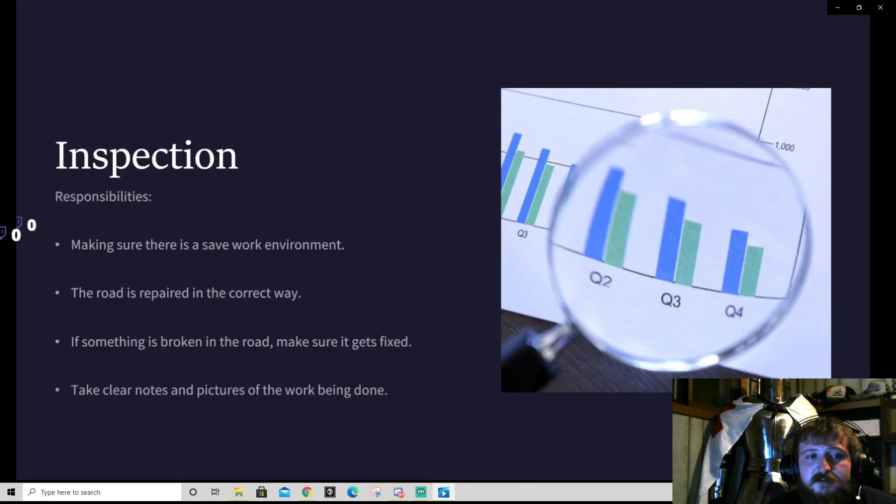Hard hats are required for anyone that enters the job site, because a lot of the times the machines are picking up heavy objects and rocks that could fall loose and hit you in the head, and possibly kill you if you're not wearing the right hat. Reflective vests are also a must, so cars on the road can see you coming, and also the people operating the machines can easily see you.

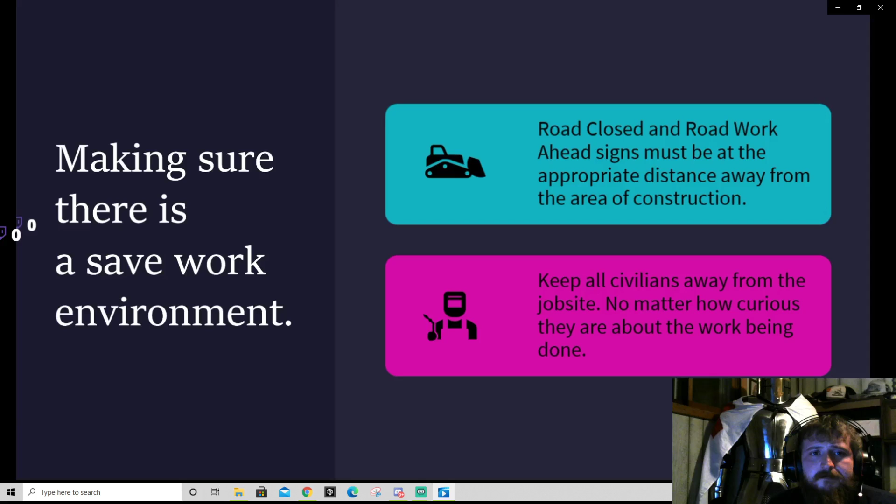Road closed and road work ahead signs are a must, and have to be at the appropriate distance. Because if a car is coming up the road, they have to know that the road is being worked on and that they cannot go that way. Also, a lot of the times people come up to you and ask, "Hey, what's going on? What's going on?" And you have to tell them to go away.

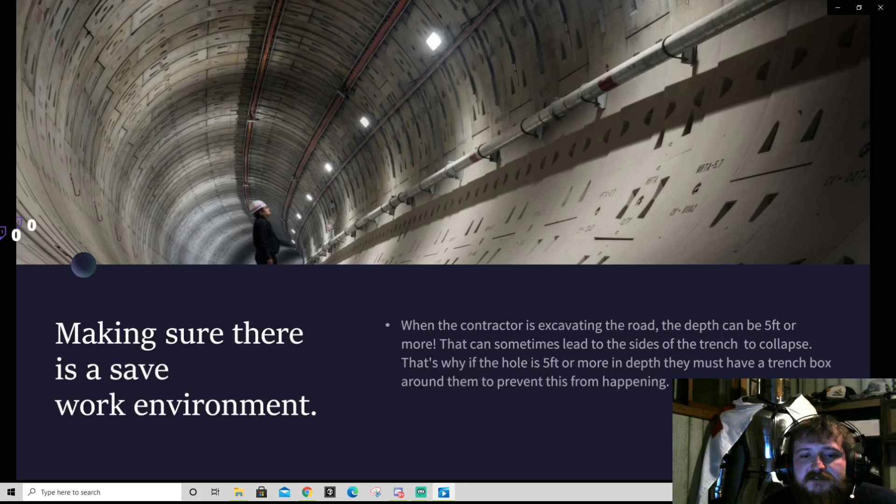When the contractor is excavating the road more than 5 feet deep, you have to have a trench box installed, because that trench box stops the edges of the roads from caving in on the workers inside, and a lot of the times that can happen. You just got to make sure that it doesn't for their safety.

If the road is not filled in and compacted the right way, potholes could form, and in PA, potholes are kind of the main thing that's wrong with our roads. The fill for the road is 2A modified, and it has to be compacted by a machine, and you can't just let them dump it all into the road and not compact it.

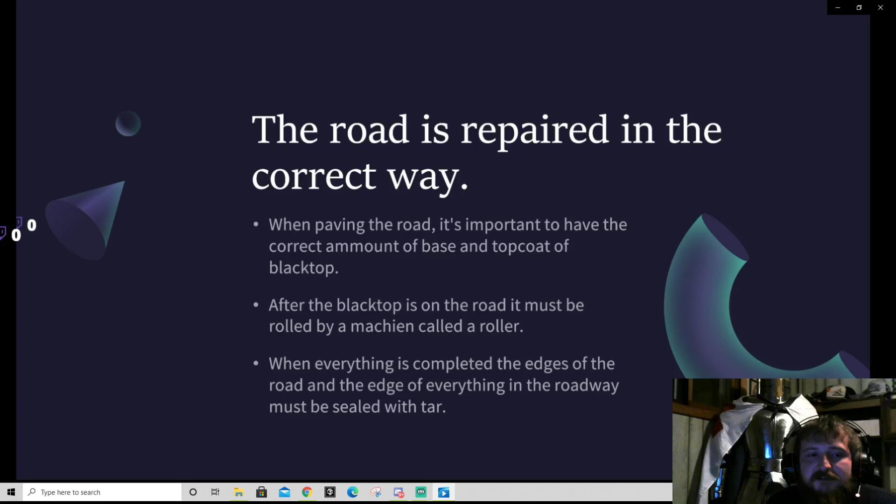When paving the road, it's important to have the correct amount of blacktop installed for the base and the top coat as well, and then after it is put into the road, it is rolled by a huge machine to compact it all down tight, and then after that, the edges of the road and everything in the road have to be sealed with tar.

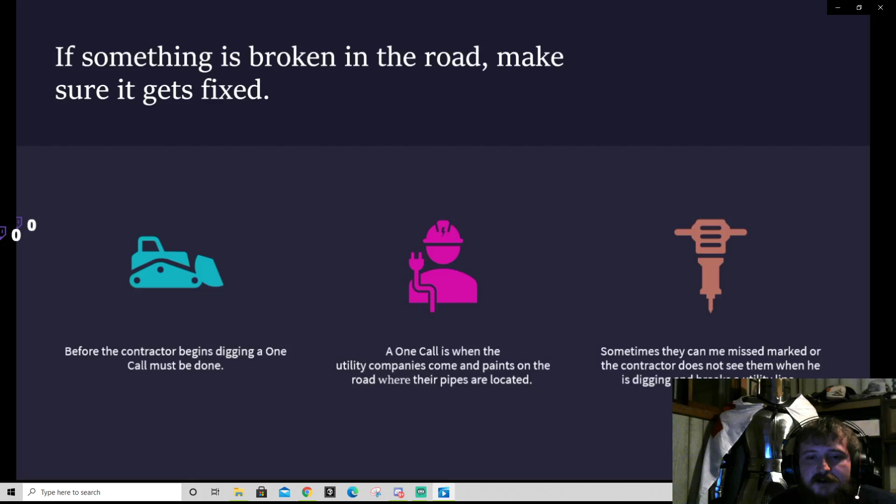If something gets broken in the road... before a contractor starts digging, a one call must be done. A one call is when utility companies come out and paint on the road where their pipes are underneath the ground, so contractors know where they are. And sometimes contractors end up hitting them because of mismarkings or they just don't see them.

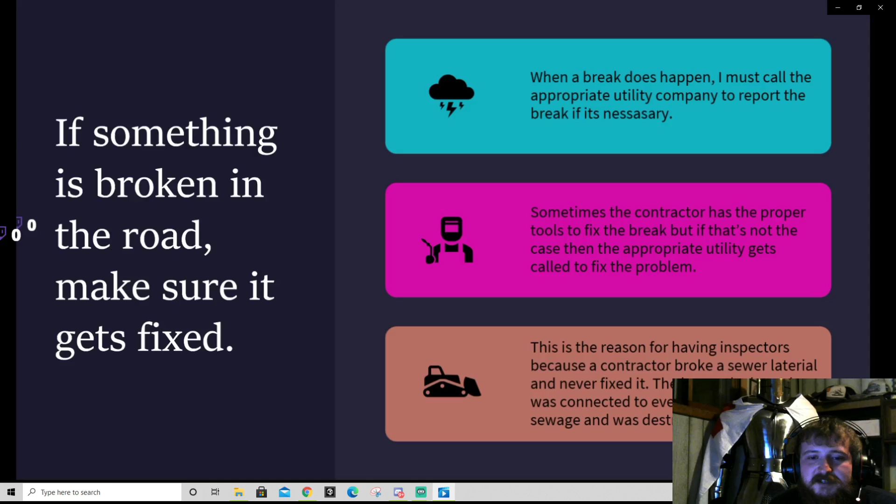When a break does happen, it's my job to call the appropriate utility company to come and fix it if necessary. But sometimes the contractors have their own tools that could fix the problem itself. This is the reason for having inspectors in the first place, because a lot of the times they don't get fixed and then bigger problems end up happening.

When inspecting, you must fill out a report for every job that you go to during the day, and that has to be a step-by-step process of everything they do. And along with that, it has to deal with broken pipes and everything else that happens during the day that went wrong. You have to kind of mark it down just so they know what happened.

And then you have to take detailed pictures as well, because a lot of the times the higher-ups want to know what the pipes look like in the ground when it's done. And obviously they can't see that from looking on top and all the dirt's put back into the road. So they like to have very detailed pictures of the pipe put together and everything that goes along with it.

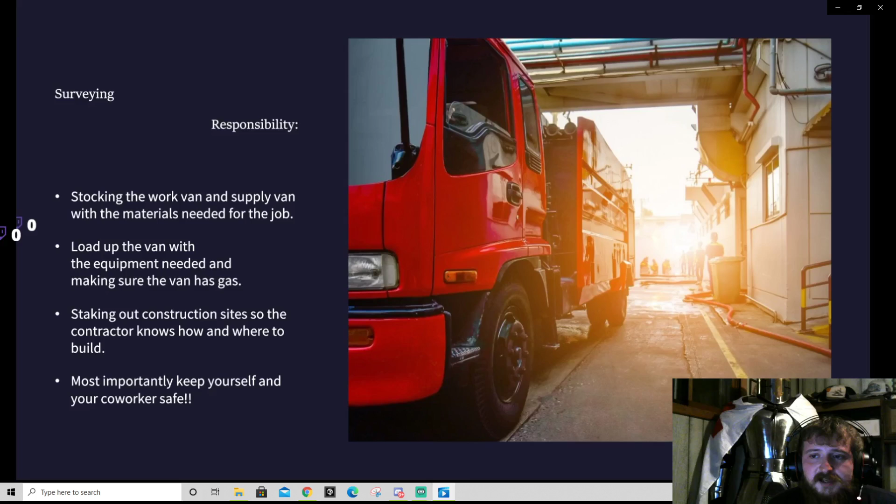Now, surveying. Surveying, there's a lot of responsibilities. I have to make sure the work van is stocked with the supplies needed for the job. I also have to make sure that we have the right equipment needed for the job as well, because some jobs require different equipment. I have to stake out large construction sites so the contractors know exactly where to build.

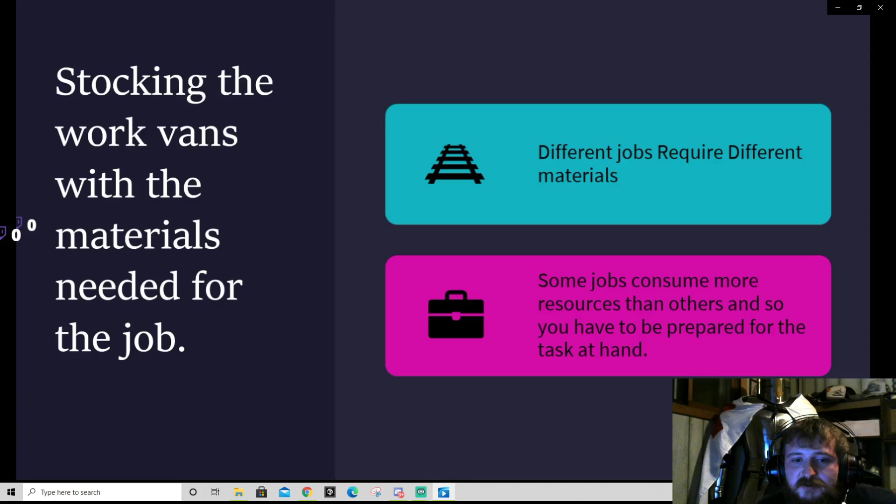Different jobs require different materials. Some jobs require nails and paint, and then other jobs require stakes and hubs. And some jobs require more resources than others. Some jobs you're only putting in 10 to 15 stakes. Other jobs could require over 100.

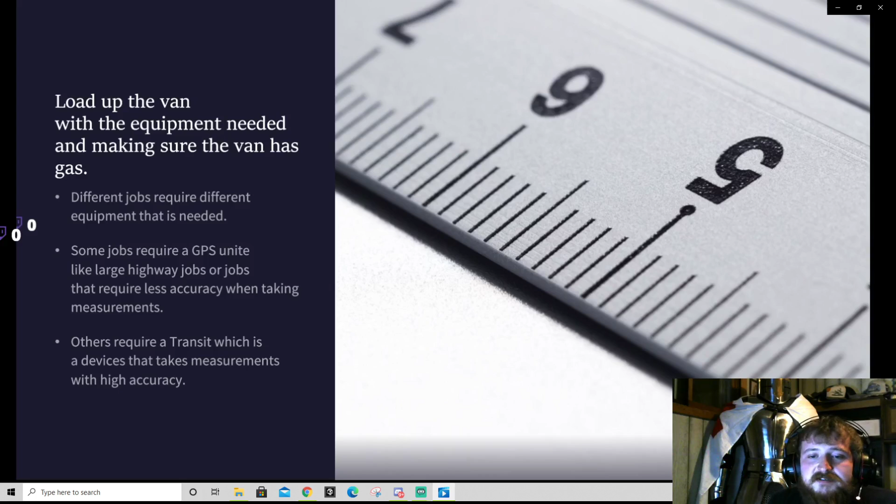Different jobs require different equipment, like I said. Some jobs require a GPS unit, which is made for bigger highway jobs, so it's easier to set up with. And then you have a transit, which is kind of more accurate for a pinpoint location and used more for elevation.

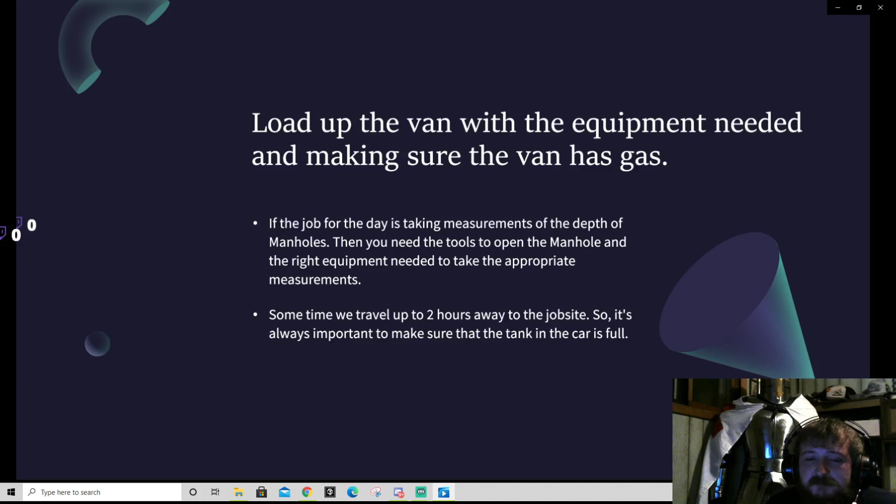If the job is taking measurement depth of manholes, you need appropriate tools for that, because you can't just open that with your hands. You need certain tools to be able to open up the manhole, and also certain tools for measurement. You can't just stick a regular tape measure down there and, yep, that's how deep the hole is. No, there's certain tools for it as well. And also the gas for the car, because we travel 2 hours away.

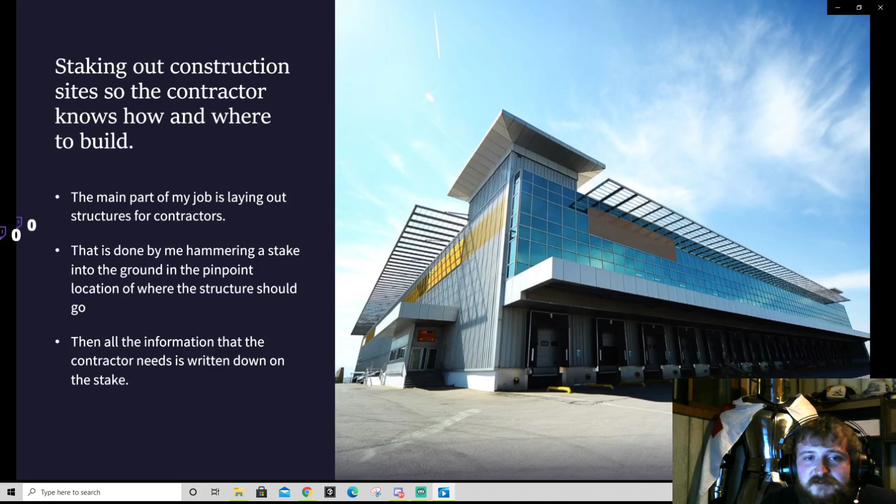The main part of the job is laying out structures for contractors, and mainly this is done by hammering in stakes into the ground and then writing on the stake what that stake represents, that point location, so the contractor knows exactly what goes in there and how deep to dig.

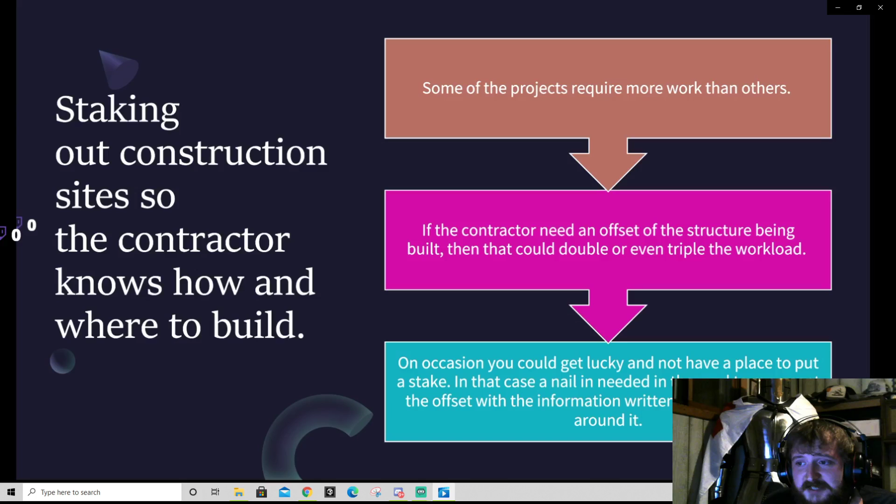Some of the projects require more work than others. If a contractor needs an offset for the structure that they are building, then it's going to double to triple your workload because obviously you have to do everything twice, which could take up a lot of time. And sometimes you get lucky and the job's really easy.

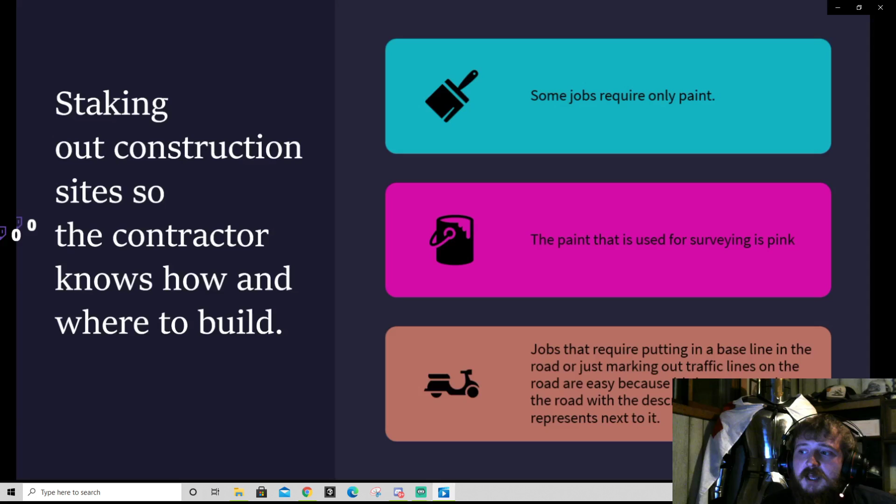And some jobs only require paint, which is sprayed on the road, or just writing out the description of a nail you put into the road. And we use pink paint to represent survey paint. And like I said, some jobs are just really easy where you're working the road, putting a nail in the road and spraying it up with some paint.

Most importantly, you got to keep yourself and your coworkers safe. A lot of the time you're working in an active roadway or even on the highway itself, and you have tractor trailers and 18-wheelers speeding right on by you. They don't care. And you just got to make sure that you're alert and that your coworkers are alert and that everybody's being safe.

And even on a regular job site that's not on a road, you have massive machines that are the size of 2-story houses driving right on by you. So you got to make sure that you have enough room for them to pass and that they see you, and also people that are driving the big excavators know that you're standing right there in your way. Because the number one is make sure you're safe and make sure your coworkers are safe.